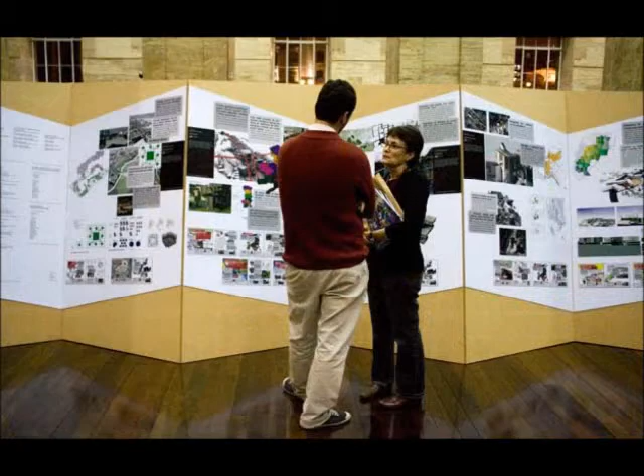Urban Think Tank is an interdisciplinary design practice dedicated to high-level research and design that deals with contemporary architecture and urbanism. It is also a partnership committed to building and sustaining dialogue between stakeholders and policymakers. They use their work to explore design as a strategy for sustainable urban development throughout the world. The delivery of innovative yet practical solutions through the combined skills of architects, civil engineers, environmental planners, landscape architects, and communication specialists is the philosophy of Urban Think Tank.

Their central conceptual premise is the study of dynamic conditions acting on modern cities, specifically regional urbanization and informal globalization. In 1993, Alfredo Brillembourg founded Urban Think Tank in Venezuela. In 1998, Hubert Klumpner joined as co-director. Brillembourg and Klumpner have taught at Columbia University since 2007, where they founded the Sustainable Living Urban Model Laboratory, Slum Labs.

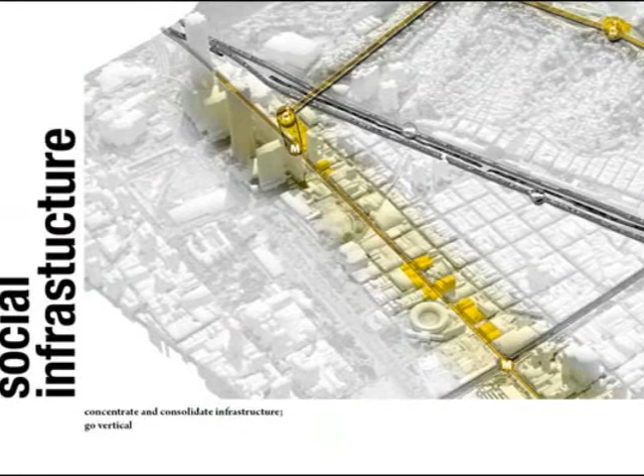Both theoretical and practical applications within architecture and urban planning have been a main focus in their work and research. Working in global context by creating bridges between first world industry and third world informal urban areas, they focus on the education and development of a new generation of professionals who will transform cities in the 21st century.

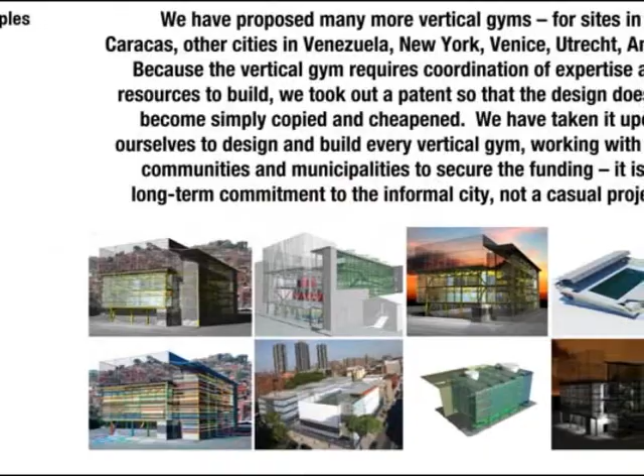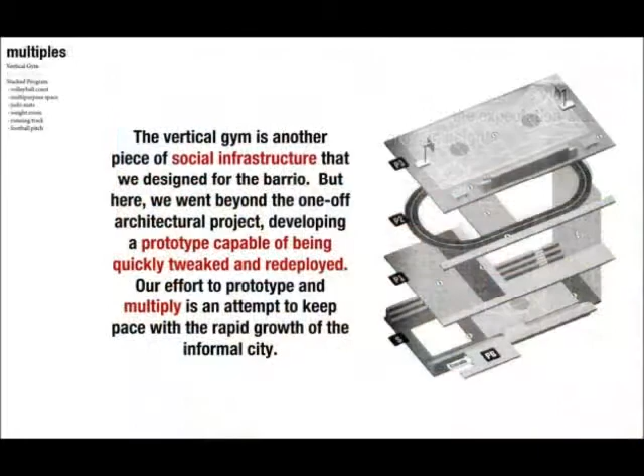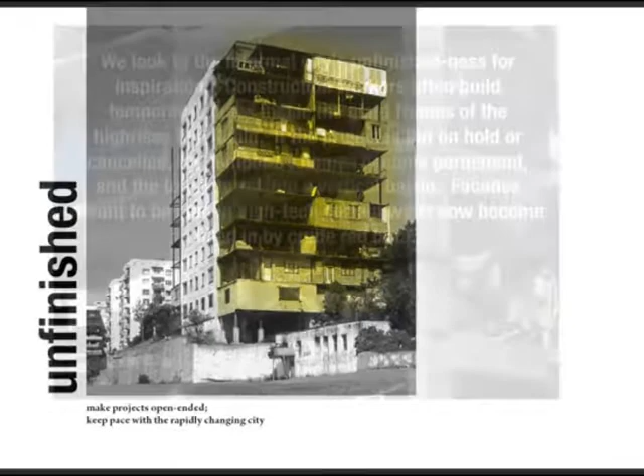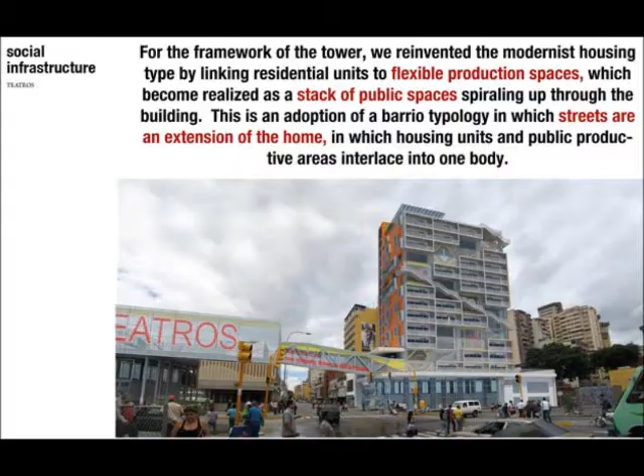Their practice adopted concrete strategies for physical appropriation and production instead of symbolic or sovereign architecture. They aim at reversing the top-bottom hierarchy to bottom-up locally driven action to governance in the public sphere. This sets up new opportunities both for sustainable development in the informal city and for using on-the-ground experience to inform future theory. The Mayor of Caracas Planning Office requested Urban Think Tank to explore potential scenarios and sites to the new train station.

In the city of Caracas, the train system is part of the largest urban infrastructural effort in recent decades. After Urban Think Tank conducted extensive research and scouting, they found the constraints imposed by the surrounding mountains in combination with the height limits caused by the obstacle-free zone of the airport. This led the city to believe that growth would only be possible on the border of the capital.

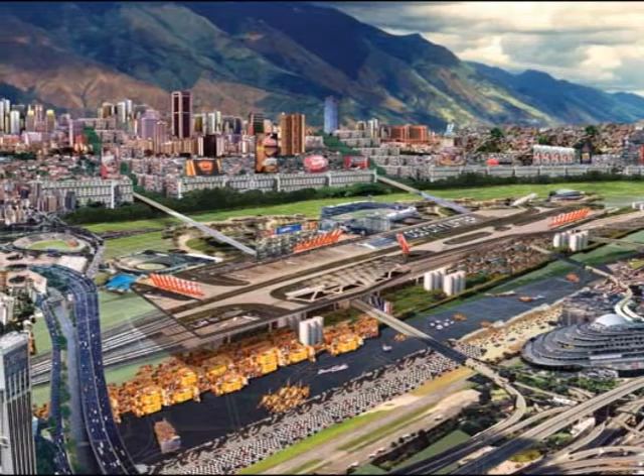Their proposed plan, the City Lifter, would keep the station near the center of the city and foster growth from within the metropolis if built. The proposed site combines a small, private, inner-city airport with the central train station located in the center of the Valley of Caracas. While satisfying the city's transportation needs, the proposed design would also provide a recreational area for residents.

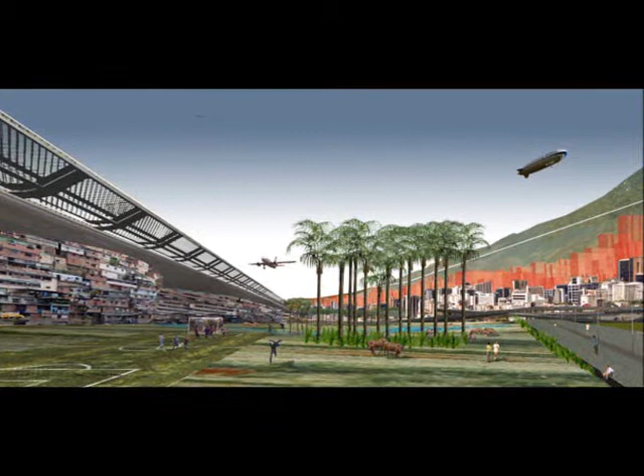By elevating the landing strip and the obstacle-free zone while placing the train station below, the existing space may be better organized and more densely utilized. In addition, Urban Think Tank has 6 vertical gym projects.

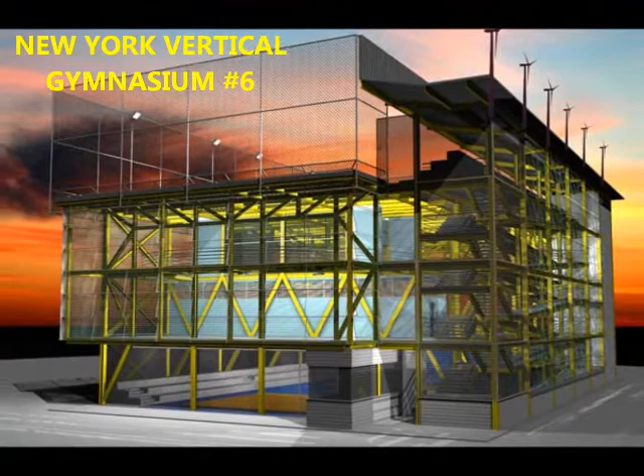One of the fundamental aims of the program is to encourage youth to participate in athletics while also bringing them into the global conversation about the major practical, intellectual, cultural, and ecological questions facing our increasingly urban world. At the center of this intervention is a vertical gym and social center design, a prototype for youth facilities and their implementation, which is then modified for each site in a global network.

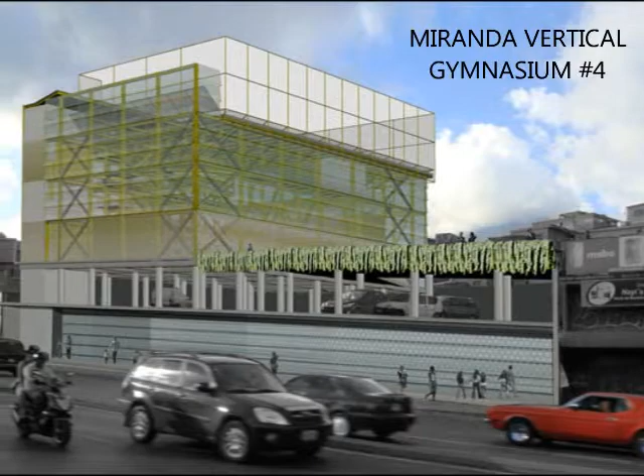The concept of the vertical gymnasiums vary from the location and the need of the communities. The densely populated sector of Caracas had a worrisome lack of schools, vocational and training centers for adults, and cultural, sport, and public spaces. A prefabricated structural system was inserted to interconnect volumes and levels. The gymnasium offers an attractive space for verticality, organized sport yards, and multifunctional areas.

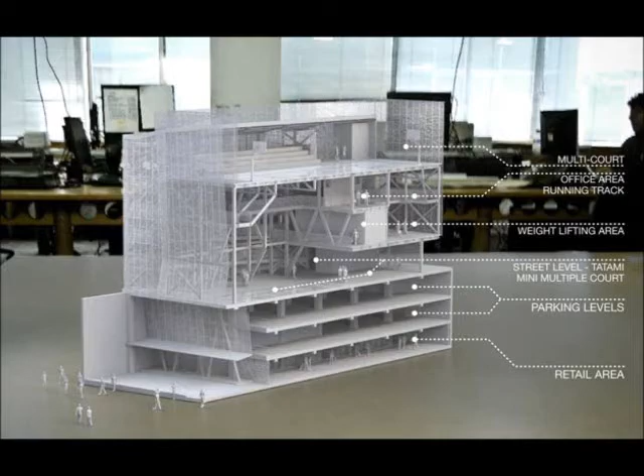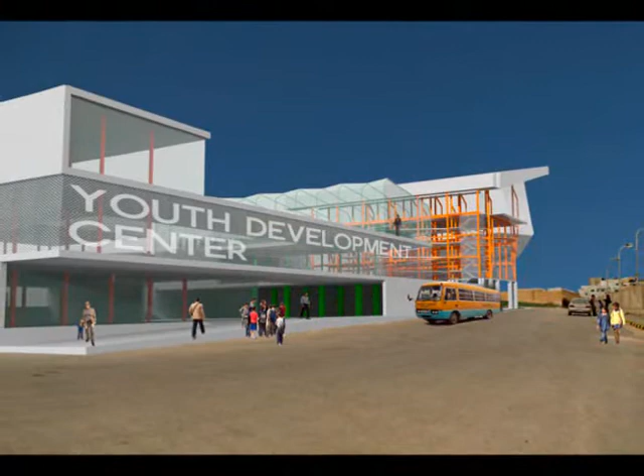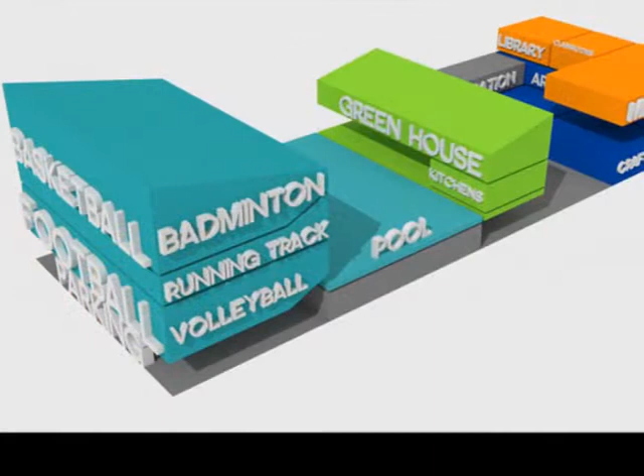Urban Think Tank was contacted by the Ministry of Social Development in Jordan to gain their assistance in placing youth facilities in low-income neighborhoods in the capital city of Amman and the neighboring refugee immigrant settlement, Rusifa. Throughout Amman Rusifa, an urban zone of about 2.6 million people, there is a serious shortage of facilities suitable for the care of children. A network of permanent youth centers will give the skills and opportunities to be leaders and to nurture and develop their community.

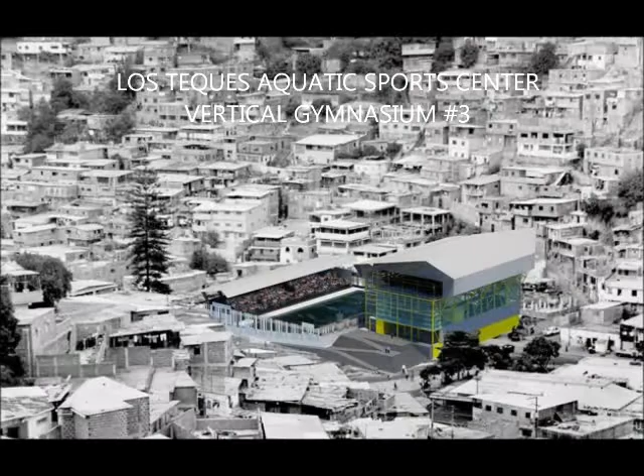The Vertical Gymnasium in Los Teques is a new iteration of the urban think tank prototype. This complex is designed according to international standards of sports facilities for people with reduced mobility. The Vertical Gymnasium congregates numerous sports activities in the same space as to meet the necessities of both athletes and the public.

Through urban think tank's perspective, architecture has failed to define informal urbanism and its effects on the city. Their research and current route of work over the past decade are viewed from three perspectives that aim to increase the understanding of the informal city.

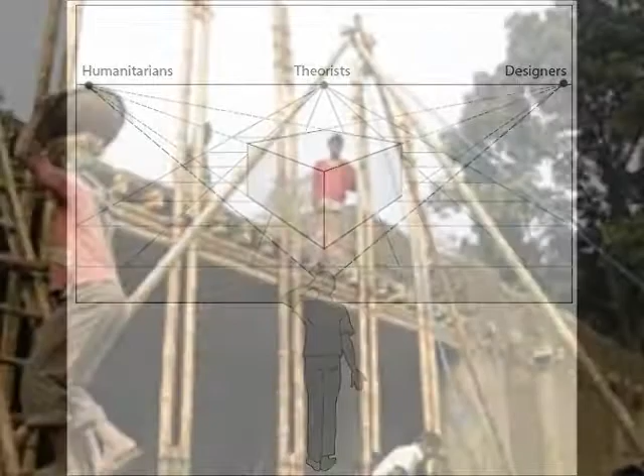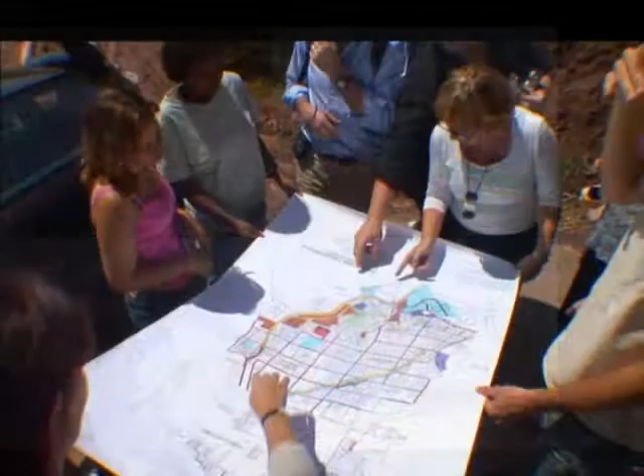The humanitarian's point of view addresses poverty and lack of support from professionals in urban shantytowns. The theorist's ideology is to mutate informality into intersecting patterns of complex nonlinear systems. Designers use the informal as a laboratory for the study of adaptation and innovation. Urban Think Tank is conducting experimental research and teaching methodology to alter the conventional limitations of contemporary architecture to shift the emphasis from form-driven to purpose-oriented social architecture.